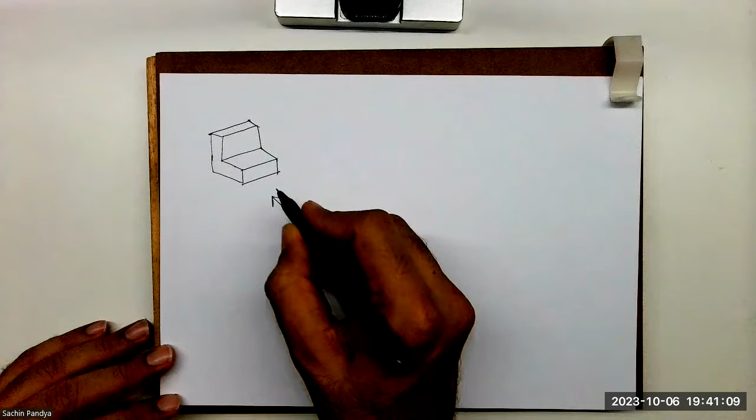It's like this. And they will say draw front view, top view, and left-hand side view. Now, why do we have to draw left-hand side view in this? Because that side we can see very easily. You're standing here, this is on your left side. So if I'm doing first angle, then what will I be doing?

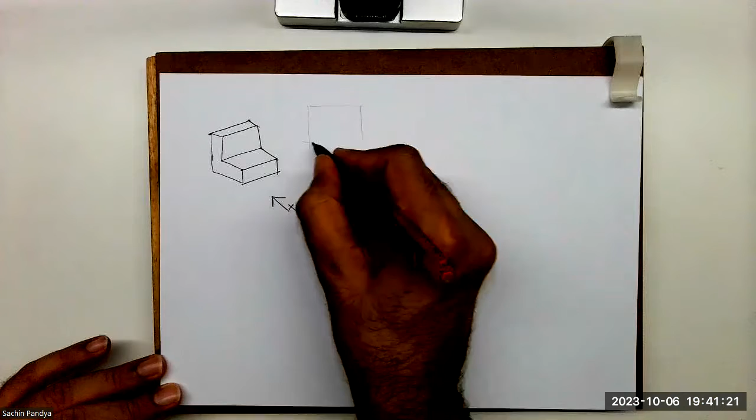I'll be drawing the layout. So I'll draw front view, top view, and then I will draw 45-degree from here, and I will draw left-hand side view, which will go on the right-hand side. Remember, I'm doing first angle right now. We are doing first angle.

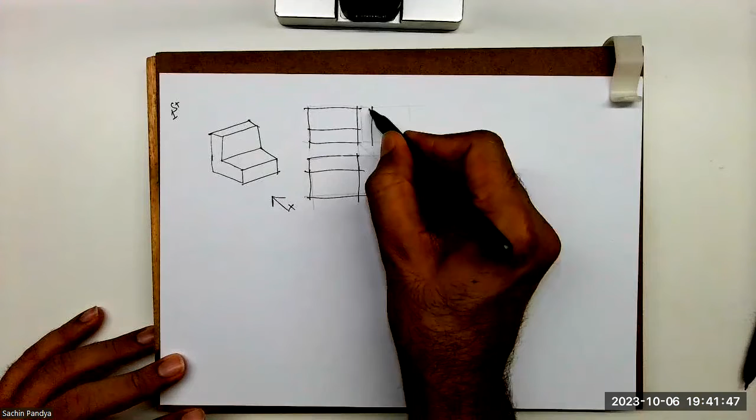Okay. So when you see from the front, you will see just two rectangles. When you see from the top, again, you will see two rectangles. It will be like this. And when you see from the side, you will see this L shape. So this is front view, top view, and this is left-hand side.

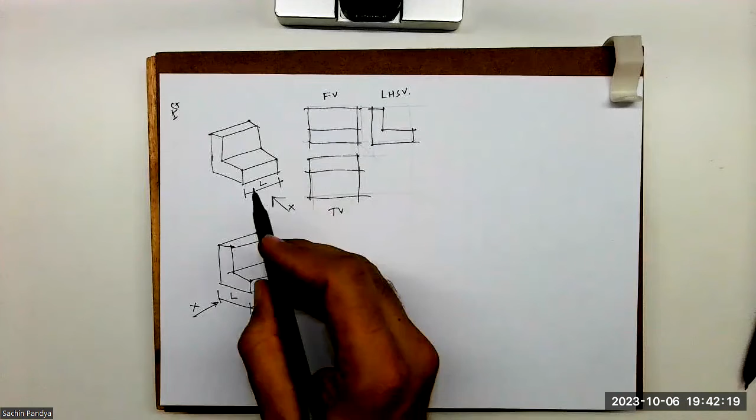Now, let's take this way, same diagram. But now X is here. So what happens? This becomes length and this becomes width. Earlier, this was length. Wherever the observer is watching, that side is length and the other side is width. But now when the observer is watching it from here, this becomes your length.

So now when you draw front view, top view, and now imagine you are standing here. So then this is your which side? Right side. So the right side will go on left in first angle. So now when I'm drawing this, this is front view. Top view would be like this. And side view will be like this.

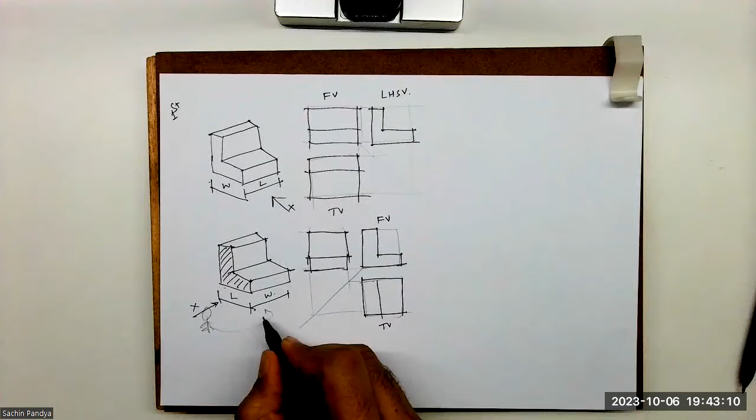So if you see carefully, views are same, only the placing has changed and slight orientation has changed. So remember, when you have to draw left-hand side view and when you have to draw right-hand side view, that depends upon X. Okay. 99% they will give you in the diagram: draw front view, top view, and right-hand side view or left-hand side view. So according to that, you need to do.

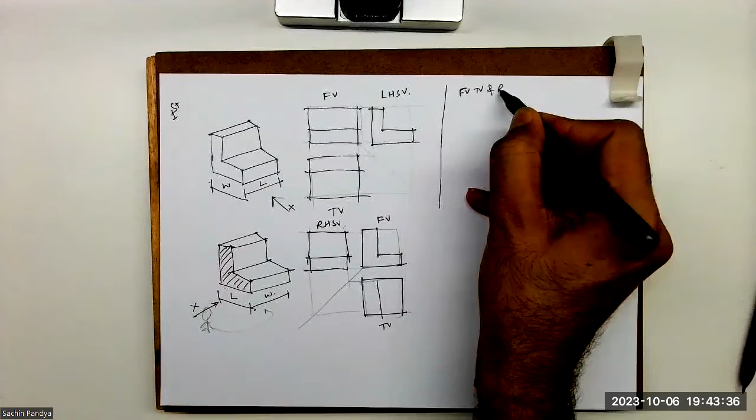So in this case, imagine you are standing here. The very obvious thing is to draw left-hand side view. Now, at times, the examiner may ask you to draw right-hand side view. Same sum. He'll say draw front view, top view, and right-hand side view of this figure 1. Okay. So now I can't see the right-hand side view, but still he wants us to draw it.

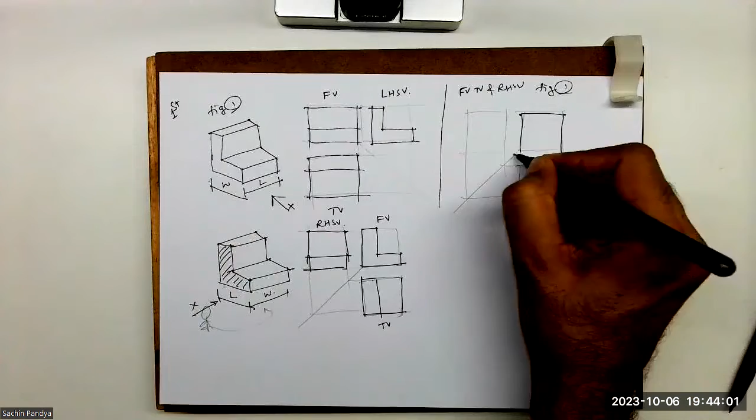So I will draw front view, I will draw top view box, and for right-hand side view, I will take 45-degree from this side and I'll project up. So now when you see, the front view will be like this. This is front view, top view will be like this.

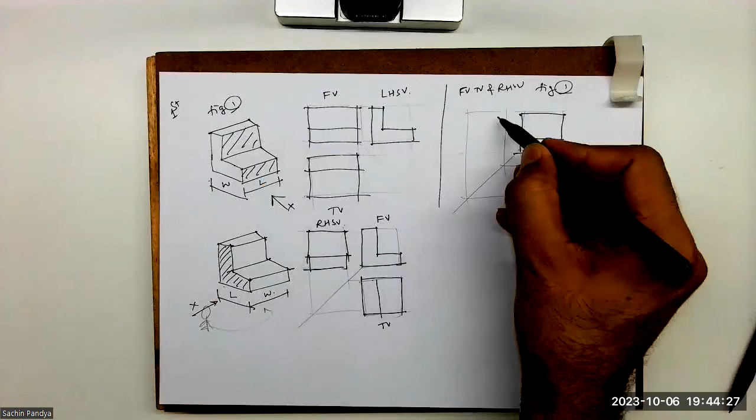Now right-hand side view, which we can't see, but always remember in orthographic, 99% of the problems are same on both the sides. Like this, left-hand side view and right-hand side view are same. Only the placing and the slight orientation will change. So with a little bit of visualization, you can say, oh, right-hand side will be like this.

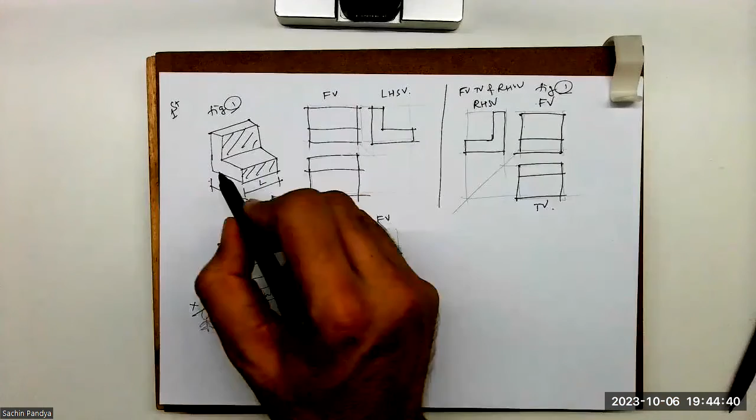They won't ask you right-hand side view in this sum. But if they ask you, remember that it will be same like left-hand side view, only thing is you have to draw it like this. Flip. Got it? So this thing you should keep in mind about left-hand side view and right-hand side view. You have to always see X and you have to read the question.

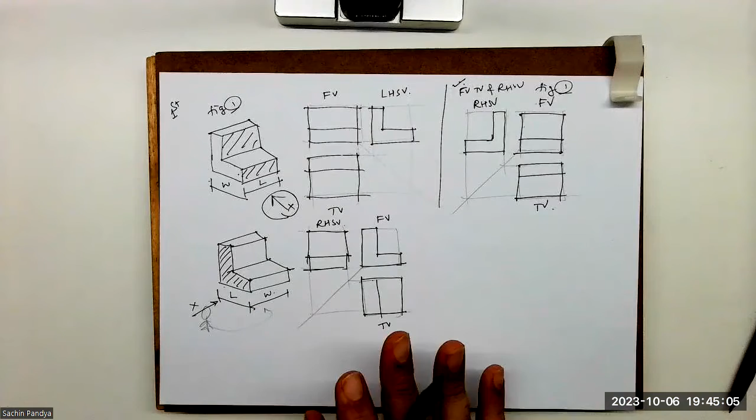So in the question, generally they will give you the view which you can see. And even if it is not mentioned, you have to always draw the view which you can see. So in this case, I can see front view, top view, and left-hand side view very comfortably. So that's how I will draw like this. In this case, when the observer is standing here, he can see right-hand side view very clearly. So he will draw right-hand side view.

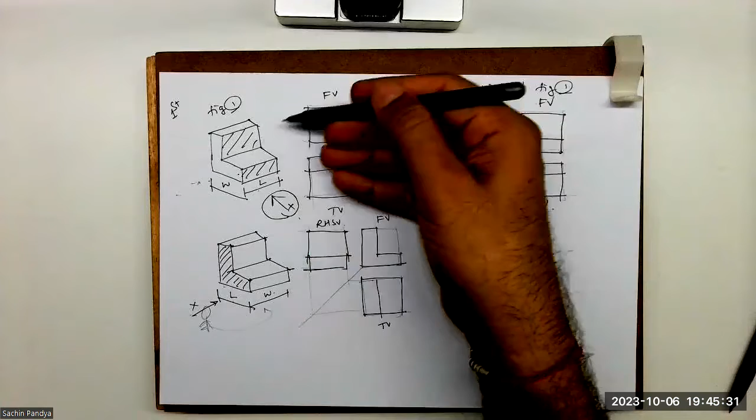But if they force you to draw the other side, like in this case, if they ask you to draw right-hand side view, you see from this side, you draw it on the other side. So this way. I hope this clarifies the difference between left-hand side view and right-hand side view.